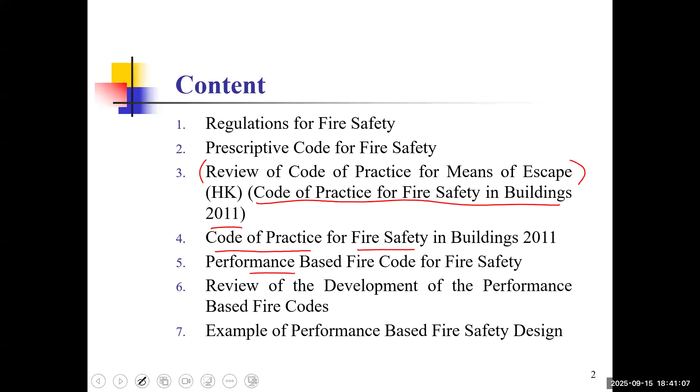Now, why do we need regulations or codes? Have you ever thought of why we need it? Or the other way around, if there are no codes of practice or regulations, what will happen?

The design may be over-provided, or in case of budget cuts there will be fewer sprinkler heads or other provisions than required. It's normally required. I usually use an example of playing board games—we need to follow some rules and regulations, otherwise there will be no correct route to follow, and everyone will play the game in whatever way they like. So we need regulations and codes for fire safety provisions in buildings, premises, or infrastructures.

For building and development control, we need sufficient and adequate safeguards. We need to make sure the building will not collapse under structural loading, and will not allow fire or smoke to spread easily. In some cases we have confinement or compartmentation, which tries to confine and limit the smoke from its fire origin, with safeguards provided for structural walls, partitions, and floors, and separations between different stories in a building.

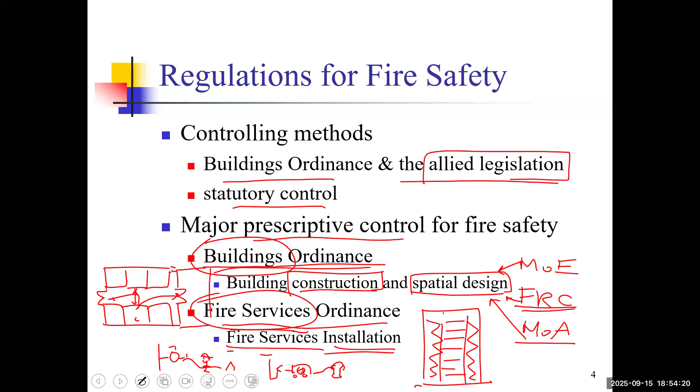Now let's look at the prescriptive code for fire safety. The prescriptive code sets forth the minimum requirement for protection generic by the occupancy. This means the minimum requirement in the FSI codes of practice for active fire service installation, we have particular systems for certain premises.

For example, low-rise hotel - the number of requirements, for example 16. We have the audio visual advisory system, we may have sprinkler system, we may have hydrant hose reel system, etc. So we need to provide these as the minimum standard.

We must provide it according to the codes. It is generic by the occupancy - depending on the usage of the building, whether it is a hotel, an industrial go-down building which is a kind of factory, commercial building for office or business, or domestic building for residential purposes. Different occupancy or usage will have different minimum requirements of fire protection.

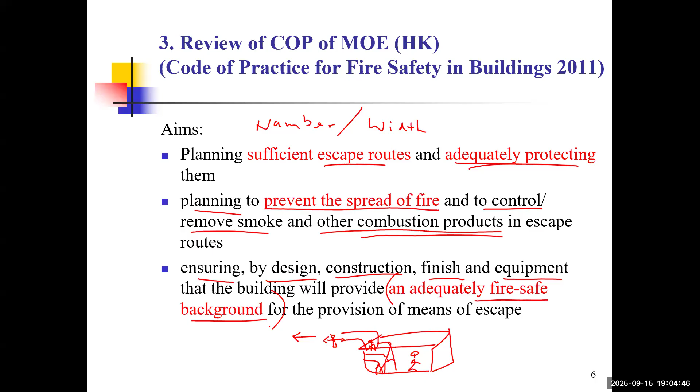If you look at the Code's requirement, which is available at the COP, HKBD for example - the Code's design, and also the manual, Code of Practice and design manual.

We can see the code of practice from MOE, means of escape, which is an out of date version, from 1996. We also have another one, which is the fire resisting construction, and one more, which is the means of access, from 2004. All these have been combined together to become the code of practice for fire safety in buildings.

Now let me take the MOE first, means of escape. The legal requirement mentioned that the requirement for MOE, means of escape, for the buildings are laid in the section of 41 Part 1 of the Building Planning Regulations.

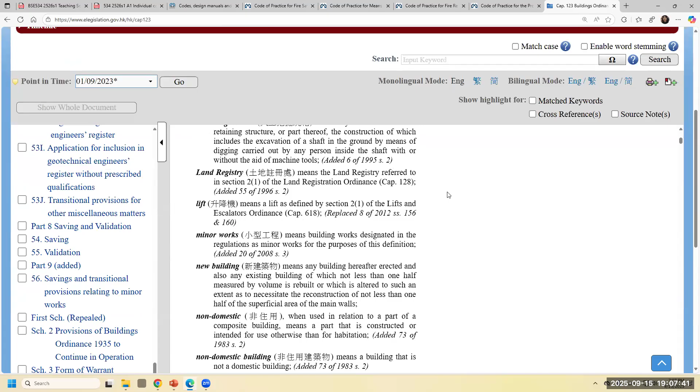We also have, let me see, subsidiary legislation 123A up to 123Q. So these are also the references we have for the Building Ordinance, the subsidiary legislation.

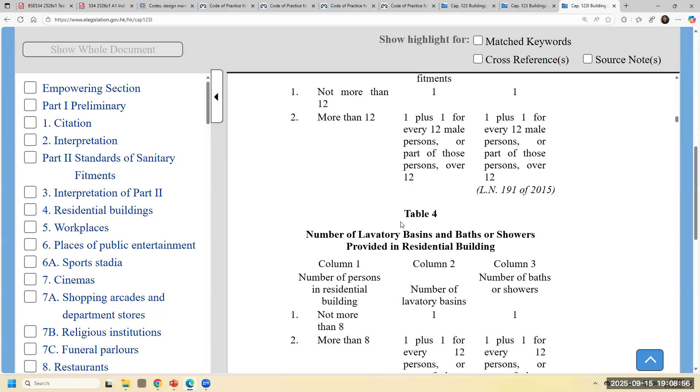Now the one that I've mentioned earlier, standards of sanitary fitments. The sanitary fitments, number of water closet fitments, the number of WC, number of persons for residential buildings, or we have the number of persons in commercial buildings, etc. The number of fitments may be determined.

The number of water closet fitments and urinals provided for male persons in workplace, 11 to 100 people: number of fitments, 1 every 25 male persons, or part thereof, being provided, which I've mentioned earlier. Just want to let you know the details as stated in the requirements. Lavatory basins, not more than 100, then 1 every 25 female persons being provided.

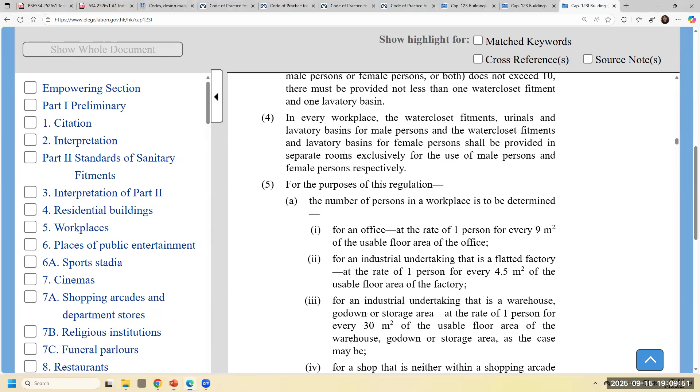Now we have the building planning regulation. For building planning regulation, 123F, building planning and interpretation - what is the meaning, and others have description. We also have guidelines on Section 41 Part 1.

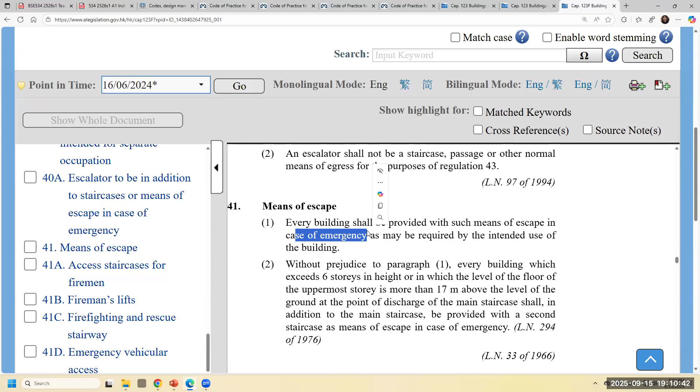So if you look at 41 Part, means of escape, it mentioned that the building shall be provided with sufficient means of escape in case of emergency, which is required with the intended uses of the building. And there may be access staircases for firemen, which allow safe and unobstructed means of access - that is the route for all the occupants in the building in case of fire.

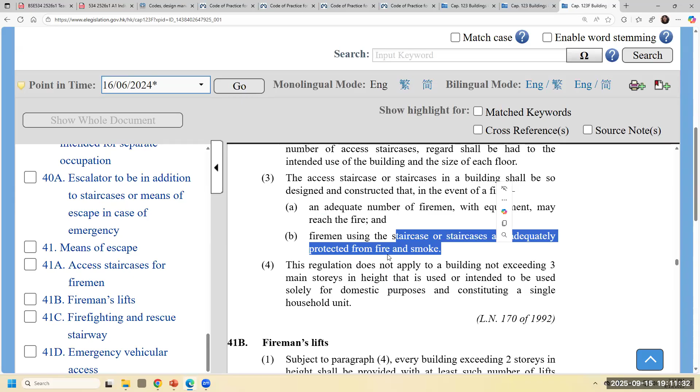So the firemen can have no obstruction in accessing the building. And also access staircases number should be adequate and had to be the intended use of the building and size of each floor - adequate number of firemen with equipment to reach the fire, and also have the staircases to be adequately protected from fire and smoke. Now 41B, fireman's lift, is also provided.

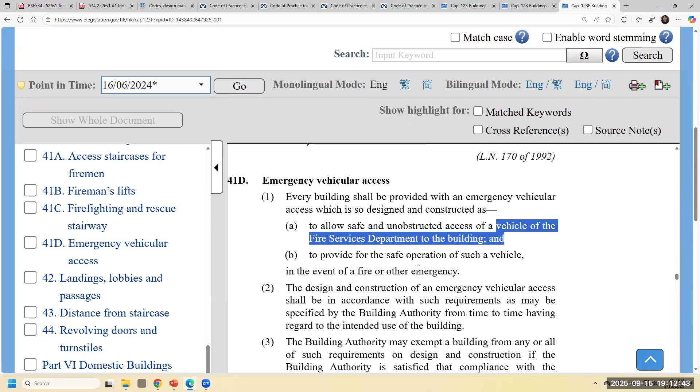Last but not least, we have the emergency vehicular access, EVA. It allows safe and unobstructed access for the vehicle - in a sense we have the fire engine or fire brigade being provided in case of emergency or fire, and operate with the vehicles. So this is the provisions, guidelines and code of practice being mentioned.

Now, basically, all the buildings except those exempted from Buildings Ordinance Control and paragraph 5.1 of the code have additional requirements. What is the additional requirement? Those requirements arose as we may have had fatal accidents occur earlier.

For example, the Bed Space Apartment Ordinance, Chapter 447. We have Child Care Centres Ordinance, Chapter 243. Education premises, Education Ordinance Chapter 279. Factories, Industrial Undertakings Ordinance Chapter 59. Number 5 is Hotel and Guest House Accommodation Ordinance 349. Number 6, Residential Care Homes for the Elderly.

So you can see that these six have different characteristics. The bed space apartment is crowded - the space allows occupants to just have a bed space, closely packed one with another, or having different layers of beds in the apartment.

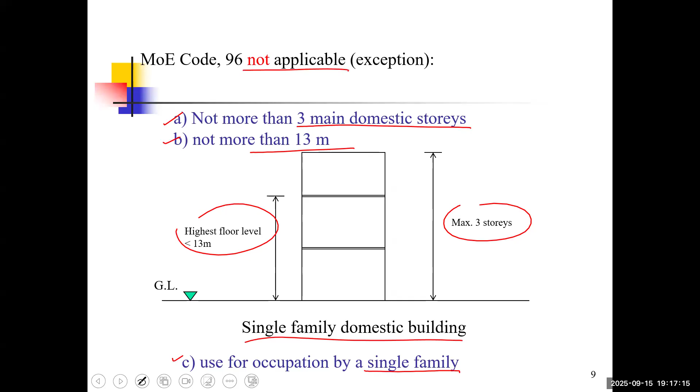Now, the first factor to consider is the occupant behavior and distribution pattern. Behavior in the sense of what activities are being held in the building. Distribution pattern is the number of occupants inside the premises, whether they are crowded together or scarcely apart.

For example, behavior - as mentioned, they can be transient, they may have sleeping risk, they may have varying awareness or consciousness. Mobility may also affect the behavior - transient, sleeping risk, consciousness, mobility, etc.

Now the distribution pattern, whether crowded or scarce - the kitchen may be an area not too crowded, but the area serving food with guests present may have tables closely packed, or the waiters and waitresses may have different patterns, or the area with toilets or corridors may have fewer persons assumed. This is the assessment of accommodation.

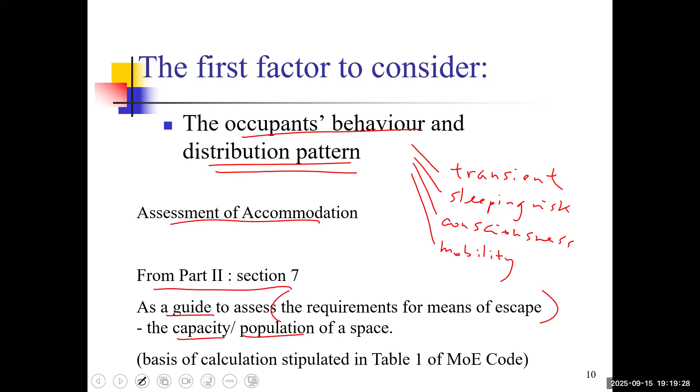We have different parts as a guide to assess the requirements of means of escape. For example, capacity and population of the space - we have a table for the number of occupants present inside the premises.

Now, factors representing usable floor area in meters square per person - that means each person occupies how many meters square. Usually, for example, an office building has 9 meters square per person. If an office area is 80 meters square, with 9 meters square per person, then we have a capacity of around 9 persons.

If it is 900 meters square, there will be 100 people.

Now, restaurant - calculated by the dining area, where people dine and have meals together, at 1 meter square per person. Whereas the kitchen allows 4.5 meters square per person.

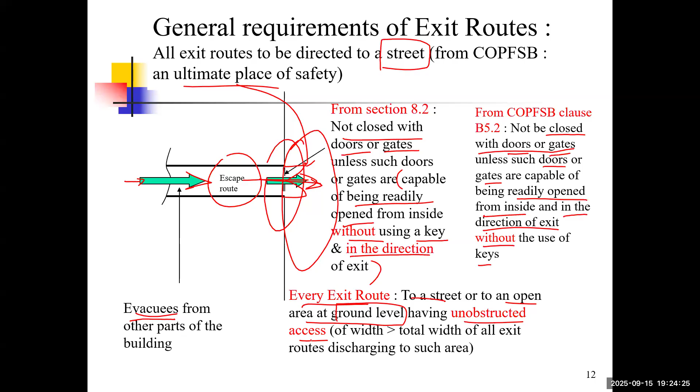Every exit route to the street or open area at ground level has unobstructed access. That means the width should be greater than the total width of all exit routes discharging to such area. We need to make sure that as we assume 1,000 occupants to evacuate at a certain width of exit, it should not overload it, and should not have, say, 1,500 occupants unable to evacuate in sufficient time.

Exit routes lead to the rear lane, the back lane of the street. This is from sections 8.5 to 8.6: a 450mm return, and the width of the exit should not be obstructed or reduced, as shown in green. So the evacuation route is escaping in the direction of the back lane or the private lane.

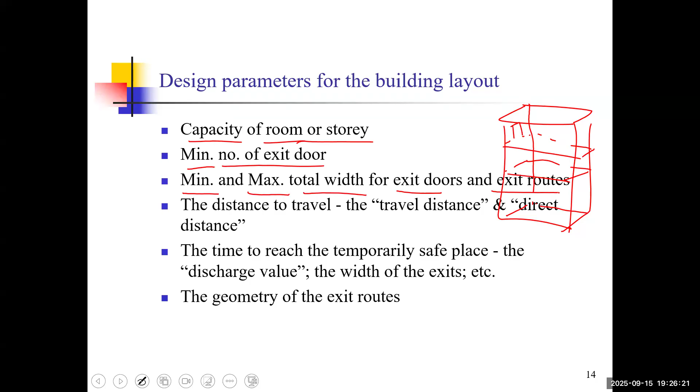Now, for the design parameters of the building layout, we look at the capacity of the room and the story. We note the floor area of each story, the minimum number of exits, the minimum and maximum width of the exit door and exit route. There may be stairs available, and here there may be another stair.

Distance to travel, that is the travel distance or direct distance, is the time to reach the temporary safe place. We have the discharge value, which we will look into more detail later, and the width of the exit, and the geometry of the exit route, whether it is a zigzag way or a direct evacuation route. So these are some of the parameters.

Where the exit door exits from the story, the flats, or each story, and the premises or room - like us, in the lecture theater, we have 2 exit doors which give access from this room to an exit route outside, to core F and core J. And we have the evacuation route, or exit route, which is a route where people on any story, like this 3rd story of the building, may reach a place of safety outside the building, like the podium level, which is outside the building, including rooms, doorways, corridors, staircases, and areas of refuge on refuge floors. In higher or taller buildings, we may have refuge floors available for the temporary stay of occupants.

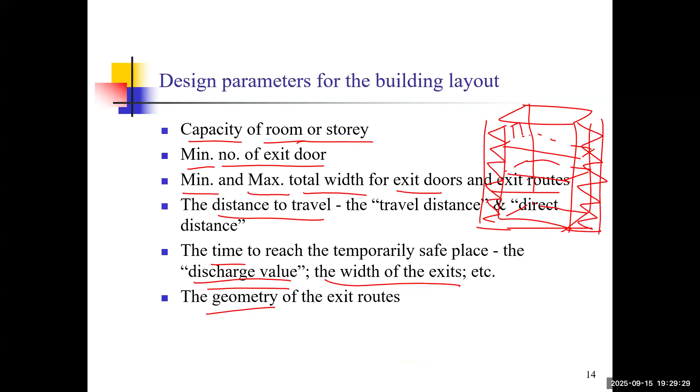As mentioned earlier, we have the number of persons checked, because each person occupies, say, 9 square meters, and we will assume, for example, 900 square meters will give you 100 people, each 9 square meters per person. And then we have this for a certain story, and if we multiply the number of stories, the width of the staircases will also increase.

There is a discharge value table for reference in later slides. When we go through it, we can have more detailed investigation on that.

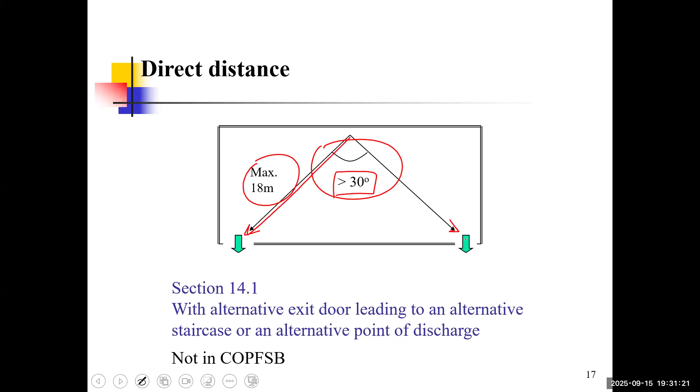So direct distance, according to the Code of Practice of Means of Escape, has a maximum distance of 18 meters for angles more than 30 degrees, which allows an alternative exit at more than one location. So in case one exit is blocked due to fire nearby, we use another to evacuate - alternative staircase, alternative point of discharge.

Dead end distance is the overall length of the travel distance within one exit route before an alternative exit is available. For a single room, we have a maximum of 15 meters if that alternative door is not provided, and the direct distance should not exceed 15 meters - that is the maximum.

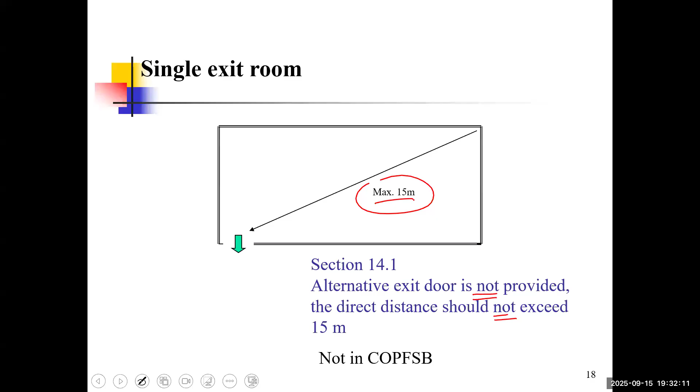Now if we look at the diagram with internal corridor access, the direct distance maximum is 15, as mentioned, D1, smaller than angle 30, and D2 is greater than angle 30, maximum 18. We have D1 here with only 1 exit door, whereas here we have 2 exit doors for a larger room, and another 2 exit doors available.

The travel distance is considered from the exit door to the staircase. We have travel distance D6, or staircase separation, D3 to D3 plus D5, which is from the midpoint of the travel to the staircase to the other staircase.

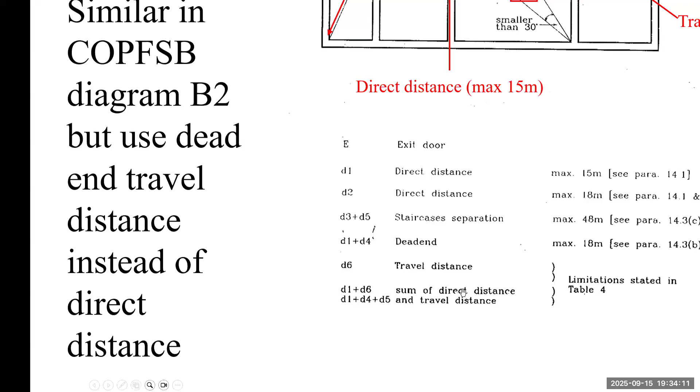The dead end is D1 plus D4, which is maximum 18. So in fact, similar to the Code of Practice for Fire Safety in Buildings diagram B2, we use dead end travel instead of direct distance. This is listed and extracted from the Means of Escape code of practice.

Now, limitation on direct distance and travel distance for buildings with 2 or more staircases. We have the maximum sum of direct distance and travel distance noted for different types of buildings - office, shops, schools, or other cases. So other than office, schools, and shops, it belongs to other cases. And there are different types of exit routes.

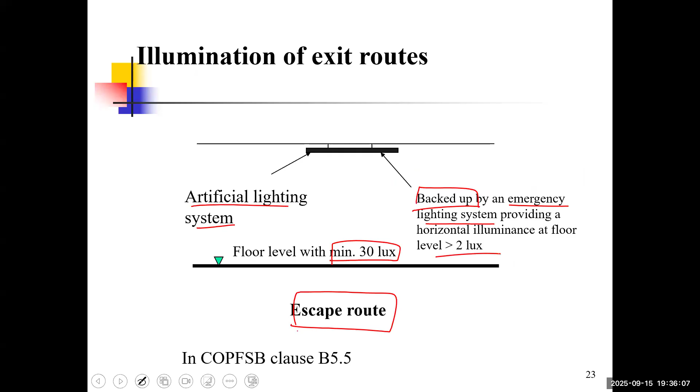Internal access requirement: A and B together given in table 4 should be within 30 to 45 meters. We have the escape route with floor level minimum 30 lux with the artificial lighting system - lights, luminaires, lamps, etc. Whereas the backup emergency lighting provides 2 lux, horizontal illuminance on the floor level.

Now, exit from the room. Capacity of room or the story will give you different numbers of exit doors. How do we determine the number of exit doors for a room? For example, 4 to 30 people, we have 1 exit door. If more than 30, that is 31 to 200, there are 2.

Depending on the total width given, even though we have 2 exits for 3 categories of occupants, they may have different widths of exit door and total width of exit door and exit route given. 1.05 meters is the minimum for 2-story, two exit doors or exit routes, whereas 1.2 is for other occupants. So the number of exits and minimum width of exit doors and exit routes are in table 2 of the MOE code.

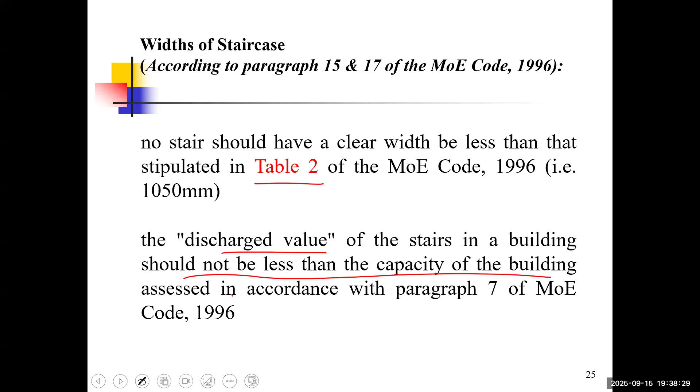Now for width of staircase, no stair should have a clear width less than stipulated in table 2. Discharge value should not be less than the capacity of the building in accordance with the Means of Escape codes.

Now here it's mentioned about the discharge value calculation. P is the discharge value, N is the number of staircases, and C is the capacity of the building over ground floor, given in table 5 and 6. Table 5 and 6 are determined by whether it is a sprinkled or non-sprinkled building.

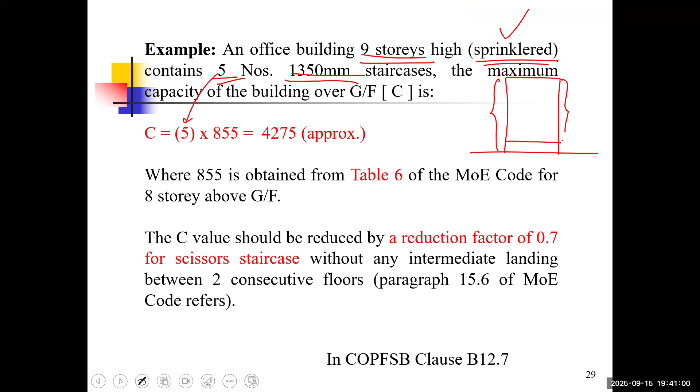Table 6, 9-story building. That means it has 8 stories, excluding the ground floor. There are 8 stories covered, total 9-story including the ground floor. So 8 stories in total. So we look at the 8th floor.

The exit width, the width of the staircase, is 1,350. So we read through this and read through 8-story: it's 855 each. Now we have 5 staircases, so approximately 4,275 people.

8-story above ground floor, so the C value should be reduced by a reduction factor of 0.7 for a scissor staircase. By experiment and research study, we noted that for a scissor staircase, like the scissors we are using, it has a construction something like on the right-hand side, the scissor staircase.

It is found that a reduction factor of 0.7 is noted without any intermediate landing between two consecutive floors. If it is just a regular staircase, we have one exit from each floor going to another floor. But for a scissor staircase on the same floor, there are 2 exit doors available on each floor.

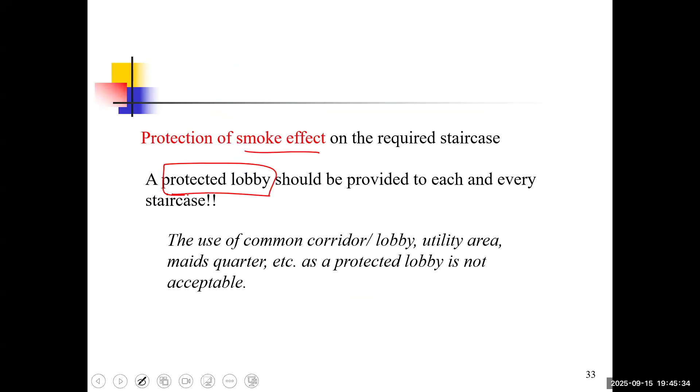Protection from smoke effect on the required staircase: a protected lobby. Sometimes there may be a double leaf of doors available before entering the staircase. The use of common corridor, common lobby, utility area, or maid's quarters as a protected lobby is not acceptable.

And the discharge value of the staircase should be greater than the total capacity of the building. So the allowed number of occupants that can evacuate from the building via the staircase should be larger than the total capacity of the building, that is, the number of occupants inside the building. Table 5 is for non-sprinkler buildings, Table 6 for sprinkler buildings.

If the exit direction is upward, as for the basement, we have a factor multiplying 0.8. If it is a scissor staircase, multiply by 0.7. This is considered a study.

Building Planning Regulation 39: for a building exceeding 4 stories, a second staircase or continuation to the roof should be provided, and the separation between staircases should be less than 48 meters. Maximum 6 stories, below or equal to 6 stories, we can have a single staircase. Uppermost story less than 17 meters above ground level, roof for refuge — this is the number of occupants permitted.

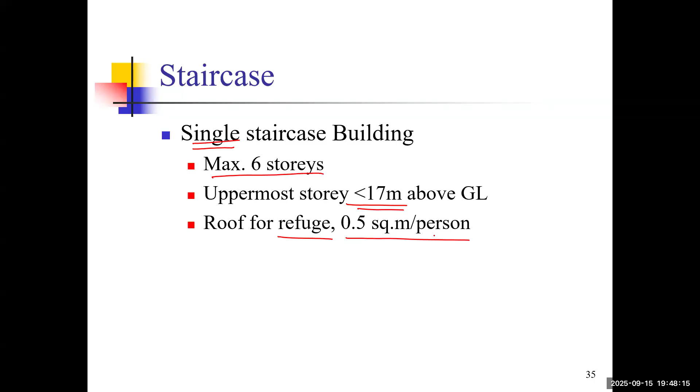Any other questions?

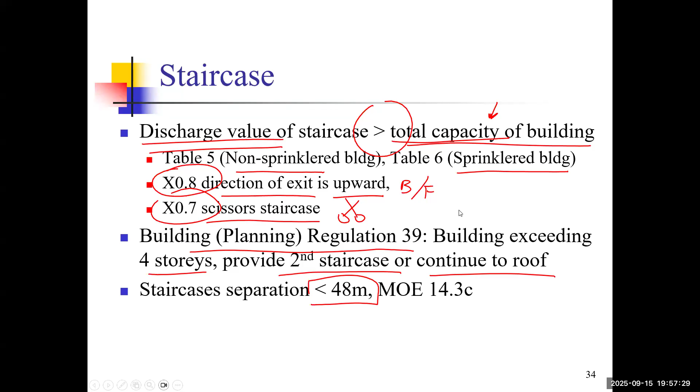Now for the exit door, across the exit or into the exit route from a story or room of capacity exceeding 30, it should open in the direction of exit, that is outward. If constructed to open both ways, it must have a transparent upper view panel so we can look through, either circular or rectangular, with glazed glass.

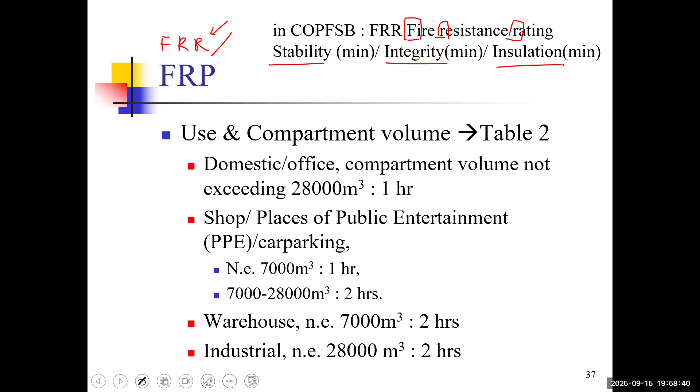Fire resistance period or fire resistance rating - the latest description is fire resistance rating, FRR, which consists of three criteria: stability, integrity, and insulation. These depend on the usage and compartment volume, as shown in Table 2.

For example, the use could be domestic, hotel, office, shops, place of public entertainment, hospital, place of assembly, car park, bulk storage, warehouse, or industrial undertaking excluding bulk storage or warehouse. It depends on the compartment volume. For example, for the atrium, we have the fire resistant period, FRR or FRP, but the latest term is FRR.

If it's not exceeding 28,000 meters cube, we just need 1 hour for domestic, hotel, and office. If it is public entertainment, shops, and hospital, etc., not exceeding 7,000, it's 1 hour. Exceeding 7,000 and not exceeding 28,000 meters cube is 2 hours.

And for warehouse and industrial, we have a separate compartment volume, separated into 2 hours for both.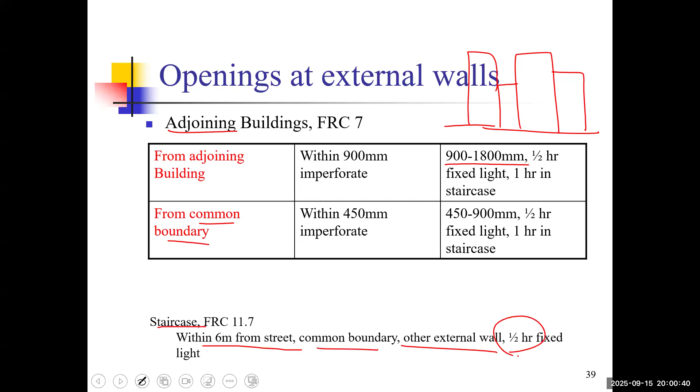We also have the vertical barrier, so in case smoke is generated, the smoke will be trapped within the certain floor before it spreads to the upper levels. This helps to buy time to prevent the spread of smoke.

Basement should have not less than 2 exits, except when it is quite low, below 3 meters in height, very small, less than 150 meters square, solely or only for lavatory or plant room purpose. No staircase serving upper floors should continue directly into the basement.

As I've mentioned earlier, we should not have the exit or staircase in continuation - we need a separate one. We need to go down and then go up to another place; it should not be continuous. Otherwise, people running down may not find the exit to the ground floor and go directly to the basement instead. There should be directional signs, exit signs. At least one exit should discharge independently from another exit into the street.

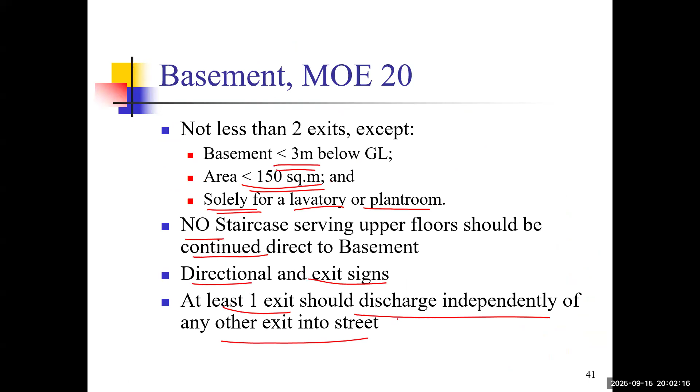Smoke outlets are sometimes provided, for example, if we have a basement, at the perimeter of the building. So this is the ground floor, this is the basement - in case smoke is generated, we break the outlet and allow the smoke to come out of the smoke outlet from the basement.

MOA, means of access, includes the access staircase, fireman's lift, and firefighting and rescue staircase, which we call FRS - F for firefighting, R for rescue, S for stairway. A fireman's lift is not required for this criteria.

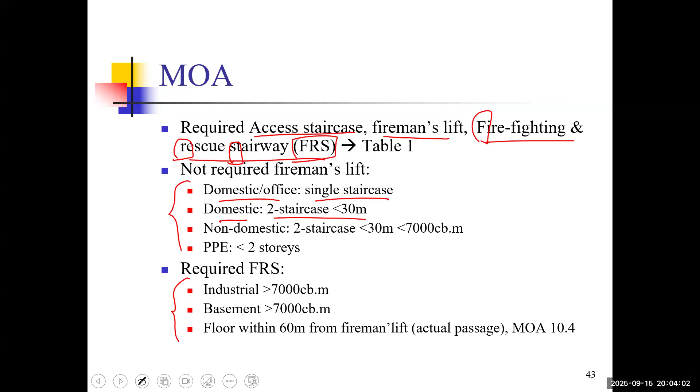In the future, if you find a similar situation - domestic office, single staircase, 2 staircases less than 30 meters, non-domestic, and place of public entertainment - this is not personal protective equipment but public entertainment, industrial basement - there is a certain cubic meter compartment volume requirement.

Fire service access point to ground floor. Push open in the direction of exit to outside. Firefighting lift, fireman's lift with an exit distance from the protected lobby, 18 meters.

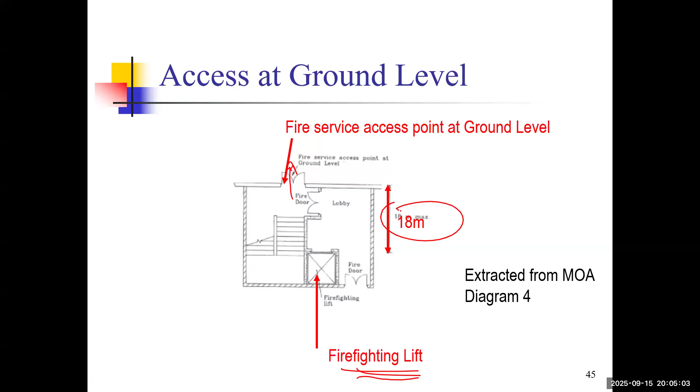Refuge floor is another part, a floor designated especially for refuge purpose. The roof can be made as refuge, with minimum 2-hour fire resistant rating, and provision of sky garden in the refuge floor.

The refuge floor should be provided for all buildings except domestic and composite buildings. For example, greater than 25-story at each 20-story interval, or each 25-story interval for industrial and non-industrial purpose. If it is domestic or composite building, you can go back to the FSI code for the definition.

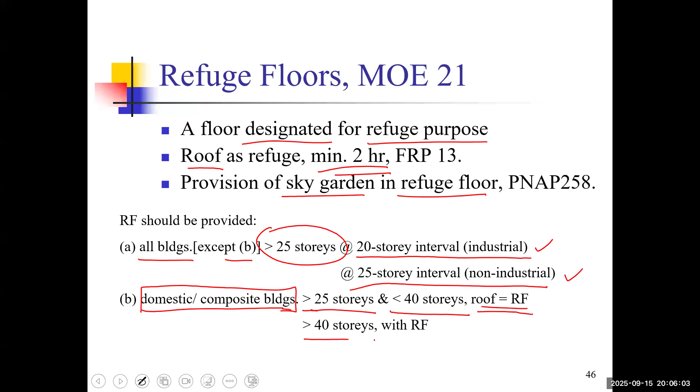Between 25-story and 40-story, the roof can be considered as refuge. And if it is greater than 40-story, a refuge floor is required.

Why is a refuge floor being provided? It can be considered as part of the exit, for temporary and short rest of the occupant, especially in super tall buildings. They need to have a refuge floor in between, so occupants evacuating should be able to take a small rest on the refuge floor, RF.

And an alternative staircase, so they need to go to the refuge floor and then go down again to an alternative staircase. In case of smoke logging, if this is blocked with smoke, it will not spread to the alternative staircase in one go. Now, place of assembly and temporary safe place for the occupant.

There are some requirements during design: no accessible accommodation, no people to stay in the refuge floor, no plant room except a net area greater than 50% of gross floor area of the refuge floor.

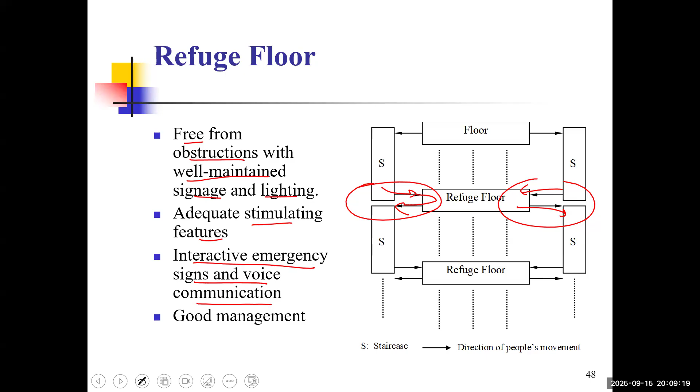No obstruction at all. Adequate stimulating features and interactive emergency signs and voice communication, so occupants are notified of the location they're staying, with good management.

Now the next part is the code of practice for fire safety in buildings. Special concern: the MOE, MOA, and FRC are in parts B, C, and D. MOE, FRC, and MOA - we have part E, which is the fire property of the building elements and components.

Some of them are load bearing and some of them are not - we may have concrete, stone, masonry, glass, etc. Fire safety management is part F, and part G is engineering guidelines.

Now for the annex, there are lists of codes of practice and guides which cover and are issued by the licensing authority for licensed premises. Now for part G, we focus on the engineering guideline.

Fire engineering guideline has several sections, including the introduction, the framework, and introduction to fire engineering. There are clauses which comply with the framework for fire engineering, and they emphasize the fire safety objectives and functional statement - this may be discussed later.

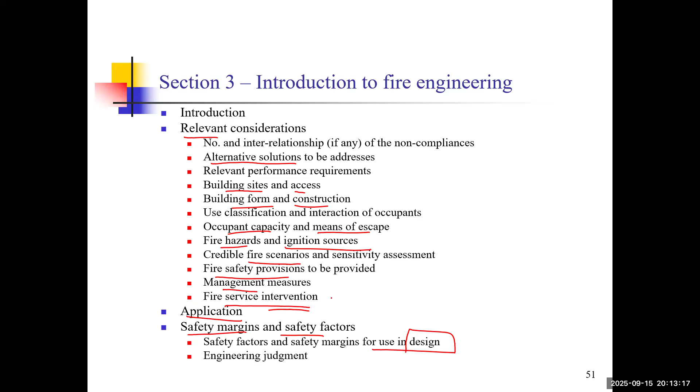Now, regarding the methodology of fire engineering, we look into compliance with the performance requirement. There are different types of assessment methodology, which include the deterministic and probabilistic methods.

And the subsystem, we have 6 of them. Subsystem, SS, which is from the start of or ignition, initial development of the fire. And after fire start, we have the development of smoke, and it may spread, and we need to control or extract it. Detection, warning, and suppression. So in fact, this indicates different stages of the fire, from the ignition stage, the development stage, the growth stage, and the decay stage. For fire spread and the impacts and how to control.

And the characteristic of the occupant will also affect the methods and the use of systems, evacuation, and fire service intervention with regard to the firemen and fire officers.

Designed by fire engineering. There are different stages of fire using different or applying fire engineering approach. And there are different processes: pre-submission, requirement, assessment approach.

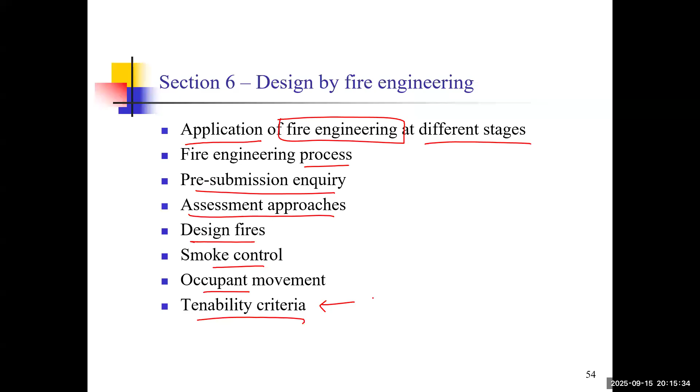Now, the fire safety assessment report. We have the introduction, and as the first items, building usage, and the classification, the characteristics of different buildings and the occupant, whether they comply with the codes, and what is the judgment or justification.

For example, we have different trial design solutions to solve the engineering problem. Assessment of structural performance, not only the active system, but the building's performance, commissioning and field testing using hot smoke tests, especially for atriums.

Atriums - we need to ensure the mechanical fans, for example, or the natural operation of the natural ventilators is functioning properly during the field test. Maintenance and management.

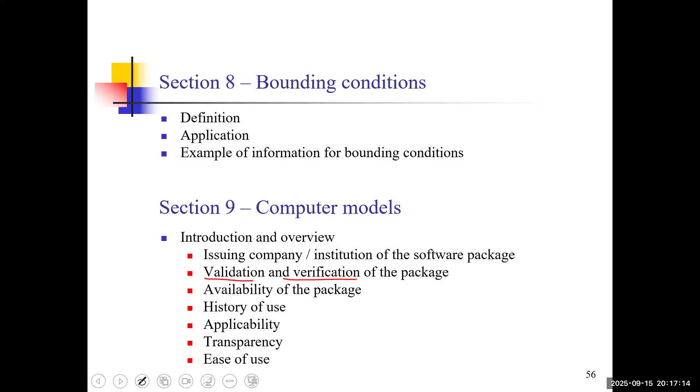Bounding conditions, information, examples, computer models, which we have validation and verification to ensure that they are correctly used and they perform accurate calculations as designed. History, etc.

Now, next part will be the performance-based fire code for safety. Consider the entire building fire and building system interaction, which may exceed the prescriptive requirement.

Especially as technology advances and also the architectural features may no longer be just rectangular shape, but they have more aesthetic design. For example, the airport or the convention center or the sports stadium, etc. Greater flexibility in design is needed.

And they should also be cost effective. They consider the use of materials, the design provisions, whether the space separation of the sprinkler heads or the detectors, etc., should be noted. Now, a need for clear specification and agreement with the fire safety goals and objectives.

And they also mention the performance criteria in design. So we need to understand how the fire developed, starting from its initiation, how it spread.

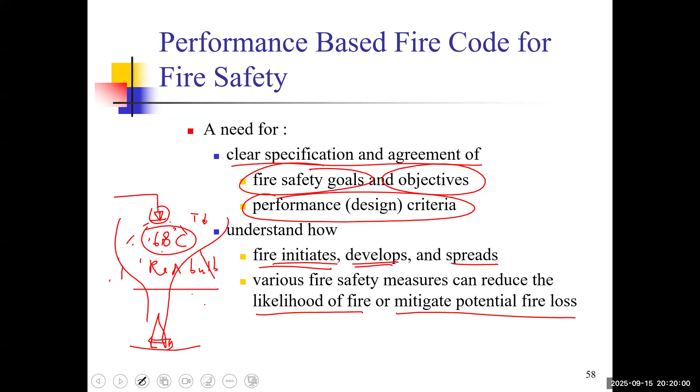It also helps to cool down the smoke, which reduces the temperature, and the structural resistance of the compartment or the room can sustain a longer duration, and it also helps to prevent the spread to adjacent objects.

It prevents and takes a longer time for the fire to spread to adjacent areas, and it also displaces away oxygen. When the water droplets change state from liquid water to steam, it absorbs heat and also changes state to steam, which will displace away oxygen. So this helps to minimize and mitigate the fire loss.

Need to understand how people react. Both human psychology and physiology need to be understood. For example, the fight and flight response: they may try to evacuate in a calm or frightened manner. They also have other situations, like trying to search for family members or friends before they evacuate. So this needs to be understood.

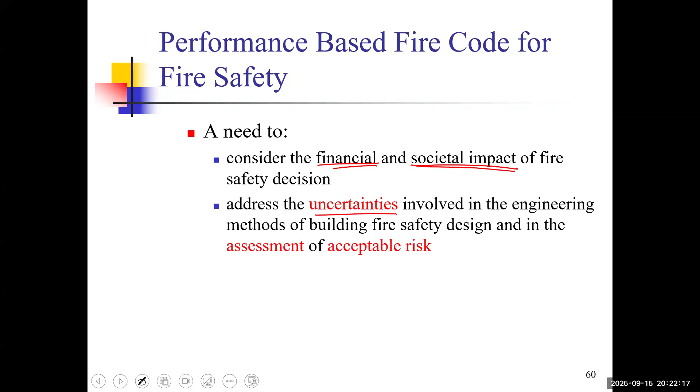They also apply credible tools and methodologies and consider acceptable risk, both personal and societal, in designing appropriate measures. So we have the personal effect and societal effect. Groups of people may try to gather before they escape, and we verify this acceptance level to be met. We need to consider the financial and societal impacts, the cost, address uncertainty involved in the engineering method, and building safety design in assessment of acceptable risk. Make sure that it is acceptable.

Now, for the review of development of the performance-based fire codes, we may have different International Standards Organization, the Technical Committee on smoke control, to evaluate ability on the fire safety design and meet objectives of the codes.

So different sections: fire initiation and growth, containment. As mentioned, starting from the initiation stage, growth stage, development stage, and decay stage. The growth stage with the steepest slope indicates flashover. Then fire development and decay.

We need to consider the containment of fire with passive design and active systems. Passively, we may try to confine or contain it by partition or wall, like a small room. Actively, we may try to suppress the fire using the fire protection system or fire service installations. Fire threat to people and the environment, and fire safety engineering. So the organization structure consists of these four aspects.

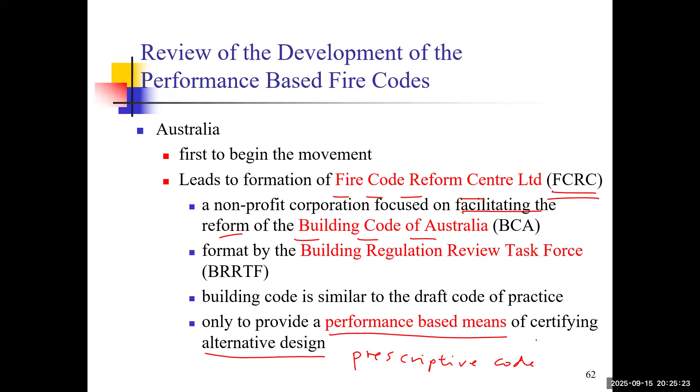Now, the building code is similar to a draft of the Code of Practice, which provides only the performance-based means of certifying alternative design. Alternative in the sense that besides the prescriptive code, we have an alternative to prescriptive. We have an alternative way to provide similar safety of the premises.

Next is Canada. David Yung, a researcher, and colleagues have the NRCC, National Fire Research Laboratory of the National Research Council of Canada. NRCC developed FiRECAM, the fire risk evaluation and cost assessment method and model, as key elements for the performance-based fire code.

England and Wales, Europe: from 1985, the building regulation has been revised and utilizes performance language to allow alternate design. It shows that it provides equivalent performance using methods with supporting calculations and reasonable methods. Now, the code of practice was further developed by Warrington Fire Research and other researchers and fire experts.

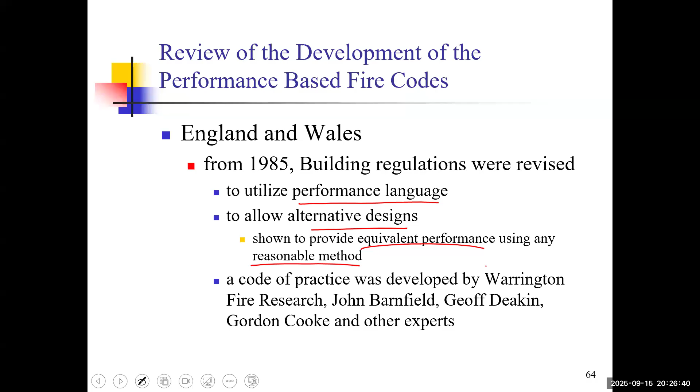New codes of practice were issued to establish acceptable levels of risk of life lost. For example, there is consideration of 1.5 times 10 to the power -5 per person per year for a house. Places other than the house have a less acceptable limit, also limiting the risks of greater than 10 deaths per incident to a certain value per building per year. Different numbers for different buildings and years.

Now to the south, New Zealand: the building codes in 1992 were introduced in a performance-based format. The codes keep the prescriptive requirements acceptable, but supporting calculations are needed for any occupancy, especially where the fire load is greater than 1,500 megajoules per meter square.

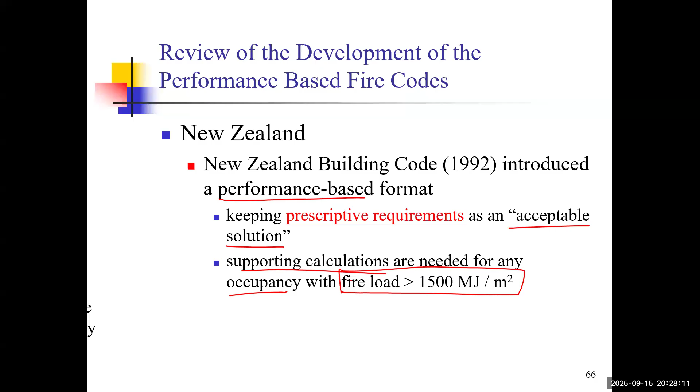There's also a fire engineering design guide published by the Center of Advanced Engineering at University of Canterbury. It's decided that the protection of property at regulated occupancy is the responsibility of the owner and the insurance company—they need to take responsibility on that. The codes only include provision to protect property of third parties.

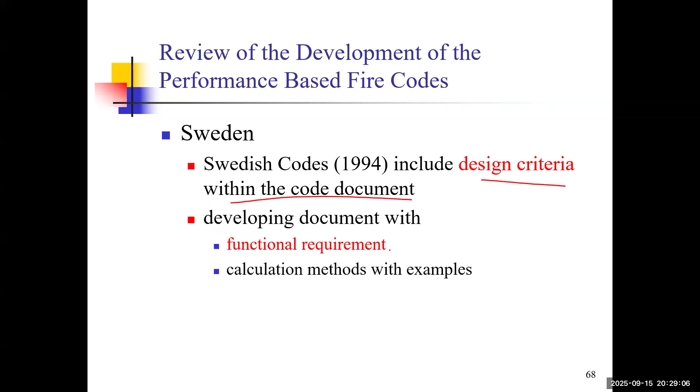Swedish Code 1994: design criteria within the code document and developing document with functional requirements, calculation methods, with examples.

US: 50 states derive activities from a number of private codes and standards organizations. NFPA, the National Fire Protection Association, published the Life Safety Code NFPA 101, based on different occupancies and characteristics of the occupants inside buildings. SFPE, the Society of Fire Protection Engineers, is also being considered.

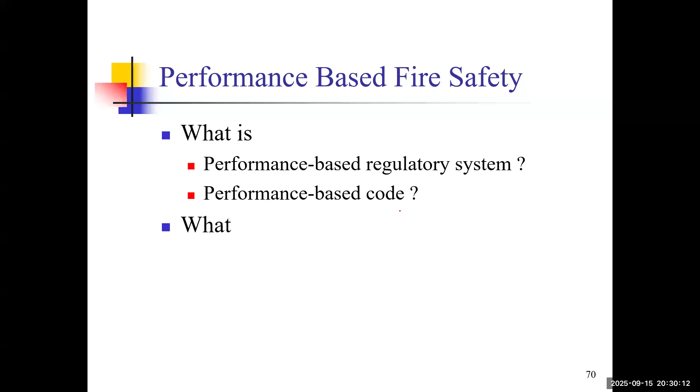Now, what is a performance-based regulatory system? And what is a performance-based code? What happens to prescriptive requirements? And how is compliance with the performance-based codes being determined? These may be some of the queries that we may have in mind.

The codes themselves have the societal goal and some objectives and performance requirements. There are acceptable solutions and options to comply with the codes. We need to evaluate whether the design matches or provides sufficient safety for the occupants.

There are different tools, for example, simulations, evacuation tools, to simulate the situation with different numbers of occupants and see whether the required safe egress time is within the available safe egress time.

Now the concept: the requirement of the code refers to what should be done. Acceptable means for complying with the requirement - how should it be done, what is the requirement, how can it be achieved. Acceptable means of verifying whether the proposed solution complies with the code's requirement - how it can be verified, how to ensure that it is acceptable.

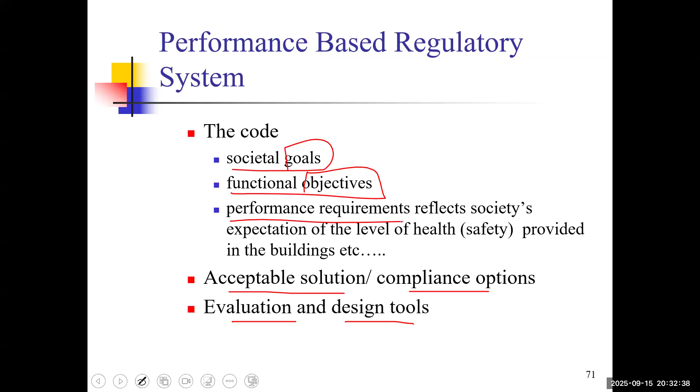For codes and standards, we have the regulatory motives for analysis and design of the fire safety measures. The building codes require an acceptable level for the fire - how large is the fire size, for example - and life safety is the fire safety objective, to protect human lives. It is not a means for compliance, and it also needs to identify some acceptable methods, some ways.

For the codes, as mentioned, we have the societal goal, objectives, performance requirement, performance criteria. This in fact reflects the maker's interpretation of the society's expectation for health, facilities, or the safety level in the buildings.

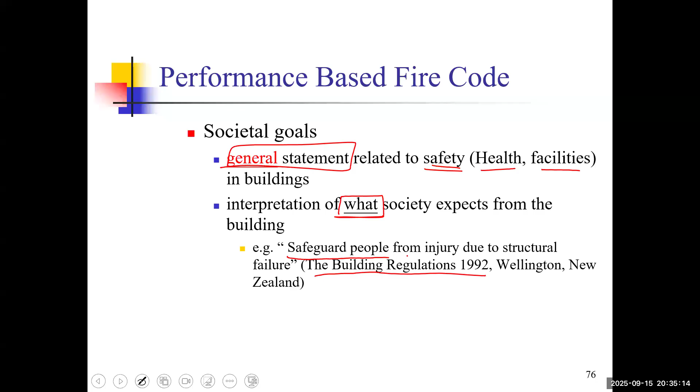For the societal goal, it is defined by the general statement which relates to safety in the building. This general statement may be considered with respect to the health and facilities inside the building and what society expects of the building - for example, safeguard people from injury due to structural failure. This is listed in the building regulations.

It is just a general statement indicating people should be protected from any injury, not injured by structural failure or collapse. Functional objective is described in more detail, how the building and the system will function to achieve the goal - how to achieve this.

For example, again the building regulations of Wellington, New Zealand: the building is to be provided with safeguards to prevent fire spread, so occupants have sufficient time to evacuate to a safe place without being overcome by the effects of fire - no suffocation, no blocking of exits due to smoke, fire, or heat. This is a longer description considering the function.

For the performance requirement, it is an even more detailed statement of the level of performance that should be met by various parts, materials of the building, assemblies, systems, components, and design factors. This helps to evaluate how the building and design features will meet the goal and functional objectives - this is also why we have the triangle, one layer after another, with the goal described in more detail through alternative solutions, function, and performance requirements.

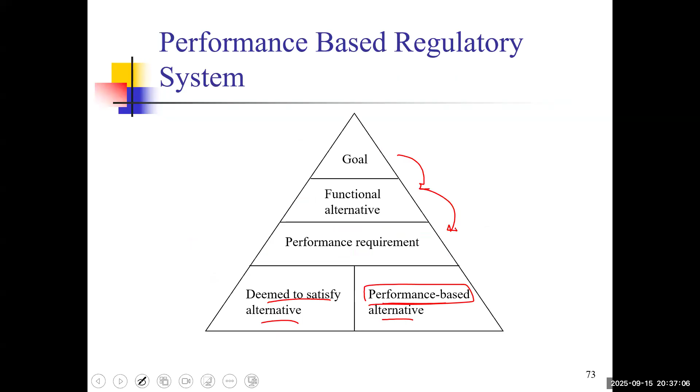Now for the performance criteria, it is acceptance criteria that may be provided in the code. Some are standards and some are other methods, taken as a reference, and some even use absolute values.

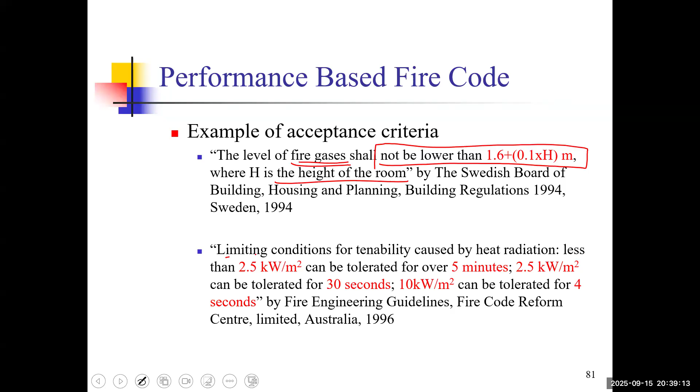Another example: limiting the conditions of tenability caused by radiation, with higher temperature, heat released in radiation, and means of heat transfer. Less than 2.5 kilowatts per meter squared can be tolerated over 5 minutes, or tolerated for 30 seconds, 10 kilowatts per meter squared tolerated for 4 seconds, according to fire engineering guidelines.

Let me check. Okay, this is 2.5 and this is also 2.5. I check whether there is a typo there. Because this is 10 kilowatts for 4 seconds, it should be increasing in the heat radiation. But this is less than 2.5 for 5 minutes, whereas 2.5 is 30 seconds and 10 kilowatts per meter square is 4 seconds.

Now for the performance criteria, several performance criteria are applicable to a single problem. We may try to select the criteria depending on the situation, using different acceptable methods not in the code. Knowledge required to develop performance criteria may not exist, because it's not sensible to regulate criteria when the scientific basis is unclear.

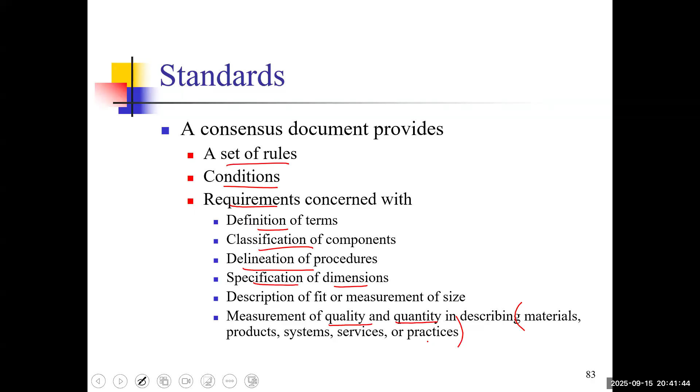For standards, it is a consensus document with a set of rules, conditions, and requirements. It also has definitions, classifications, delineations, specifications of dimensions, etc. So it is a measurement of both quality and quantity to describe different methods, different materials, products, systems, etc. There are different descriptions.

Further on the property of material, whether it has sufficient strength, elasticity, durability, combustibility, etc. What is the amount of heat release? Is it durable? Dimension, pipe thread size, the diameter of the pipe internal and external, diameter of the pipe works. Test procedures for how strength, flame spread, and electromagnetic compatibility are tested. There are methods and procedures for installation, testing, commissioning, maintenance and operation, etc. Terminology is also required.

Now, most current building system related standards are prescriptive based or specification based. So it's stated clearly what types of building usage and what systems should be used and what the specification is. Take hydrant and hose reel as an example: we may try to limit or specify the performance of the hydrant outlet. For example, it needs to be of a certain height above the finished ground level, and it needs to have pressure and flow rate of a specified range.

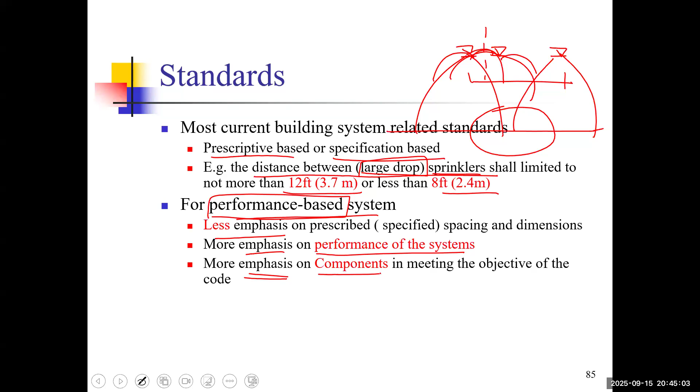Performance-based systems place less emphasis on prescribed spacing or dimension. So if it is performance-based, we do not specify a specific distance, but place more emphasis on the performance of the system, whether it can achieve the objective or functional objective of the sprinkler system to attain life protection or inhibit fire spread, and more emphasis on the components meeting the objectives of the code.

There are different acceptable methods for the engineering standard or engineering practice developed through a consensus process. Qualified engineers, educators, and researchers are involved, and there is a reality check by the broader building and fire community, so a large number of buildings are taken into consideration in surveys and studies. Each automatic sprinkler system requires another section of the code to be installed according to NFPA 13, which is a standard for installation of sprinklers, as an example.

Computer fire modeling as a design tool or for evaluation requires peer review. Different parties or researchers will be involved, challenging certain tools to ensure they are valid and verified. They are developed in, or receive positive evaluation through, a consensus process among qualified engineers, educators, and researchers, who are positively evaluated to make sure they have the ability to generate outcomes consistent with those claimed by the developer.

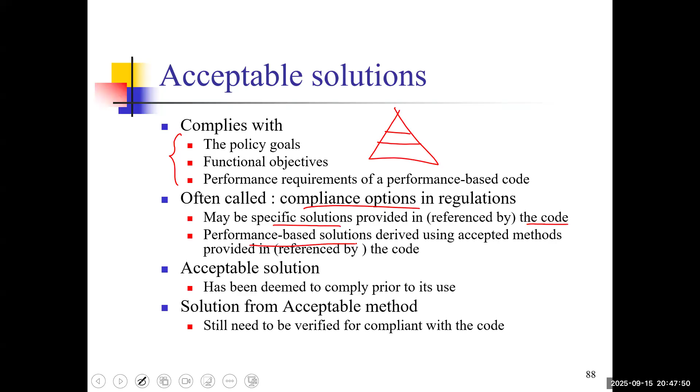Acceptable solutions comply with the three main goals: the objectives and the performance requirements, often called compliance options in regulations. They can be specific solutions in the codes, or performance-based solutions, which have different methods provided in the code. For acceptable solutions, they are deemed to comply before their use, meaning they need to be ensured to comply or achieve the same performance as the prescriptive codes. Solutions from the acceptable method still need to verify compliance with the codes.

Now for modeling. Computer modeling in fire safety engineering design is not simple. We need to understand the physics and chemistry of enclosure fires. For example, what you have studied in fire dynamics, BSE 533, may be useful to assess the validity of the result and also make sure that the simulation result is accurate.

There are different types of models available in the market. Some are probabilistic models, some are deterministic models. Probabilistic models include the network model and the statistical model, whereas more often we will consider zone models or field models. CFD, computational fluid dynamics models, are commonly known.

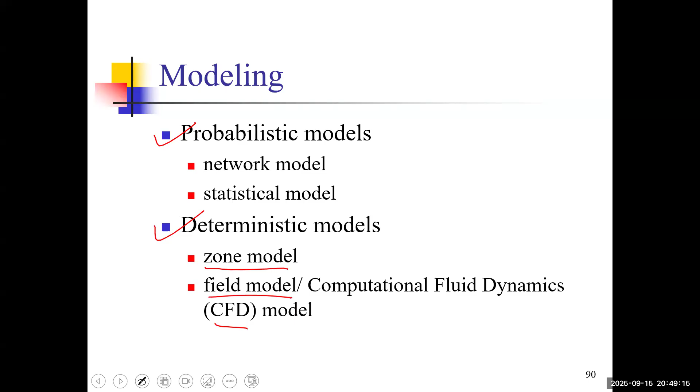Now for the probabilistic model, it relates to building fire safety, which does not make use of the physical and chemical principles involved in fire. Some statistical predictions are made, considering change from one stage of fire growth to another, as mentioned, the different stages of fire. The course of fire is described as a series of discrete, separate stages, based on experimental data and incident statistics, and they are derived as time-dependent probability for the possibility of fire changing between different stages.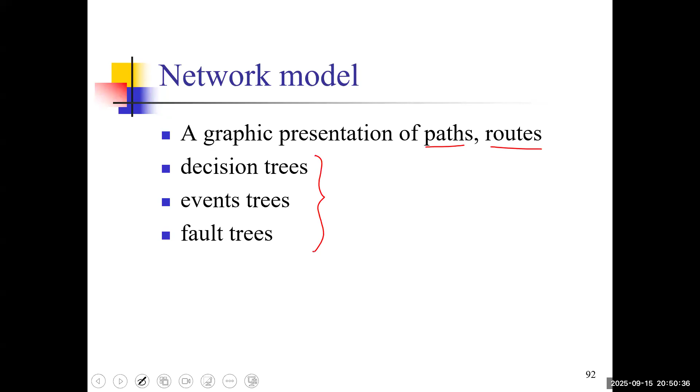Network model usually considers some graphics presenting the paths and routes. There are some event tree, fault tree analysis, and decision trees being made. And for the statistical model, it describes random phenomena with probability distribution based on historic data, engineering evaluation, or both.

One of the common simulation models is the Monte Carlo simulation. It involves fire development and determines ignition, flame spread, fire load, and ventilation. Sometimes in the fire stages it is a fuel- or ventilation-controlled fire, and the computer program will also randomly allow the fire to progress from one defined stage to another, studying the importance of the parameters.

Whereas for the zone model, you try to divide the room or compartment into two zones: one is the upper layer and the other is the lower layer. This is usually called a two-zone or two-layer model.

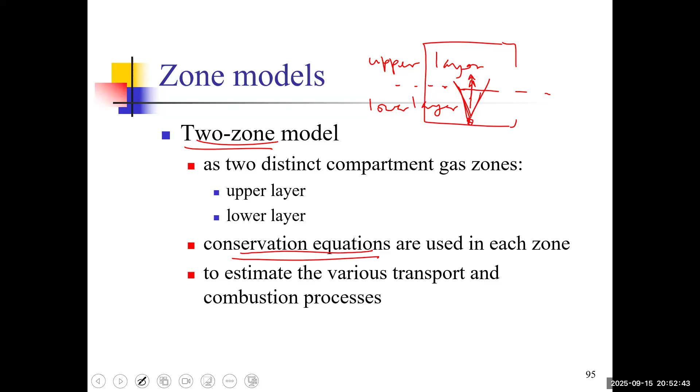Conservation equations consider there is a point source, the mass transfer is conserved, and another conservation equation is considered through the lower zone to the upper zone, with the fire plume being considered as an inverted cone. This is used to estimate various transport and combustion processes in between.

So this is the hot smoke layer usually — the upper layer having hot smoke. With its high temperature, density will decrease and it will rise to the top, whereas there is air entrainment in the lower layer, where cooler air is available, and usually openings should be provided at lower parts.

For the room fire, normally we have the fire occur, for example, at a polyurethane sofa, with air entrained and a smoke plume considered. When it hits the ceiling, there is a ceiling jet spreading radially throughout the whole compartment, so the smoke layer gradually forms.

With the hot smoke layer, it is considered as two zones, a hot zone and a lower zone — one is hot and one is cold. With the mass transfer in between the fuel and the hot smoke layer, we have the control volume as stated in the two-zone model.

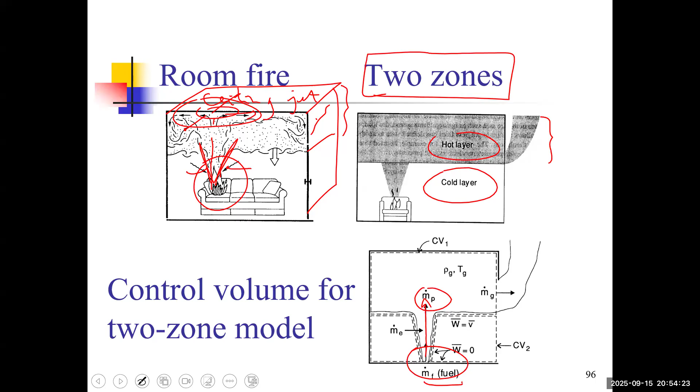The fire itself is a source of energy, and it is a source of mass — the plume. The fire's plume is to transport the mass to the upper layer from the lower layer, or from the lower zone, with entrainment.

With the hot air having less density, it rises, and a temporary vacuum will occur, and adjacent air will entrain into that vacuum and replace it. A larger volume of air will increase as a result, with the smoke plume increasing in size and volume.

A main assumption is made: the gas is treated as an ideal gas, meaning it has constant molecular weight and constant specific heat, Cp and Cv.

The zone model also exchanges mass at the boundaries because of pressure difference and shear mixing. Combustion is treated as a mass and energy source. The plume is assumed to instantly arrive at the ceiling.

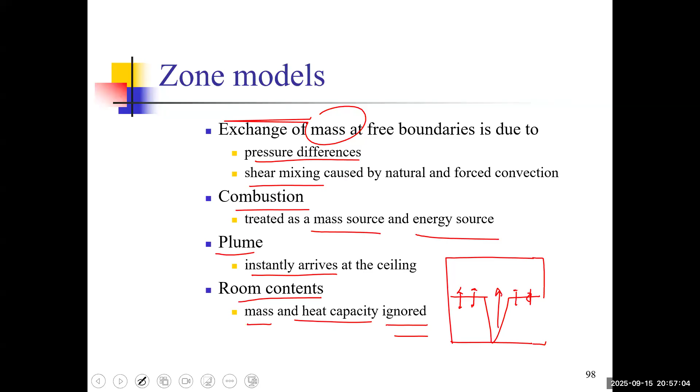A major problem is the too-clear structure — actually there is some transfer in between these two zones, not just through the plume, but there may be others. So these are some of the assumptions made.

One of the two-zone models is called HAZARD I. It is developed by the National Institute of Standards and Technology and calculates the development of fire effects with thermal, toxic gas, and smoke with respect to time.

CFAST is another model, which is Consolidated Fire and Smoke Transport. It is a popular two-zone model developed by the Buildings and Fire Research Laboratory, also from NIST. It helps simulate smoke movement in up to 18 connected rooms. FASTLite, or Fire Growth and Smoke Transport, is a combined computer package with FPETool and CFAST, but it's limited to 3 rooms only.

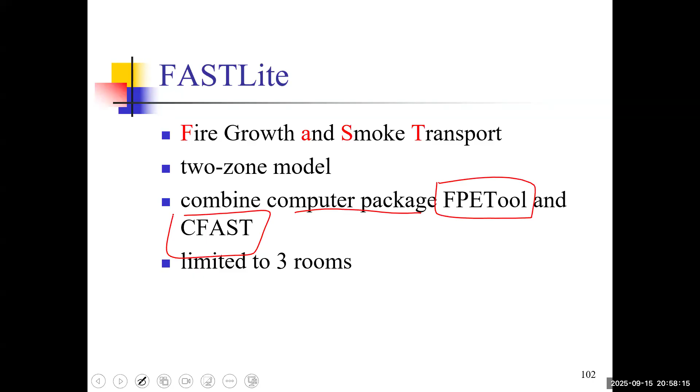Now, after zone models, we have the field models. Field models involve finite difference methods and finite control volume methods. There are partial differential equations, for example the Navier-Stokes equations. It involves turbulence, radiation, and combustion, which are three sub-models that need further investigation.

Field models have limitations because the physical principle behind the turbulence has to be reviewed, and the scheme for discretization of the set of equations needs to be considered carefully. The algorithm involves the pressure-linked equation, treatment of boundary conditions, and results have to be compared.

More advanced knowledge can be learned from your Computational Fluid Modeling subject, which is BSE 531.

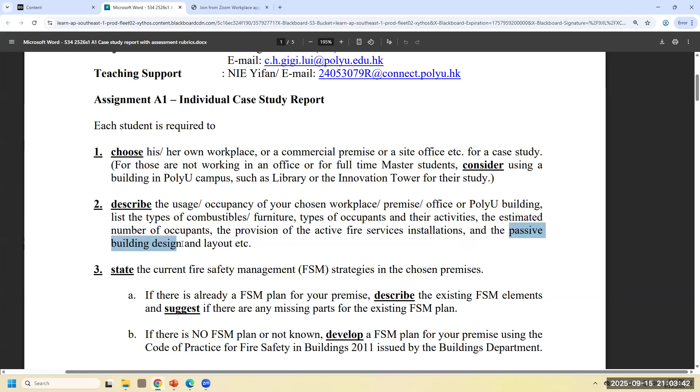Try to state the current fire safety management strategies in the chosen premises. I understand some companies have their own fire safety management plan or scheme, which may be in a booklet or in some publications. If there's already a fire safety management plan for your premises, try to describe the existing elements, how it is being covered, and suggest if there are any missing parts. If there's no fire safety management plan, or it's not known whether there is one, try to develop one for your premises.

Using the Code of Practice for Fire Safety in Buildings 2011 issued by the Buildings Department, as you know this Code of Practice is available, and remember Part F is on fire safety management. But I'm not asking you to directly copy all the items.

For example, in the maintenance plan, what do you need to focus on for your particular area or office? This depends on the fire load present, combustibles present, and the occupant characteristics. Office A should be different from Office B - they may have different fire loads, areas, or number of occupants. Training plan: are the staff well trained, or are there transients - people who just come over for a short time and do not know the environment well?

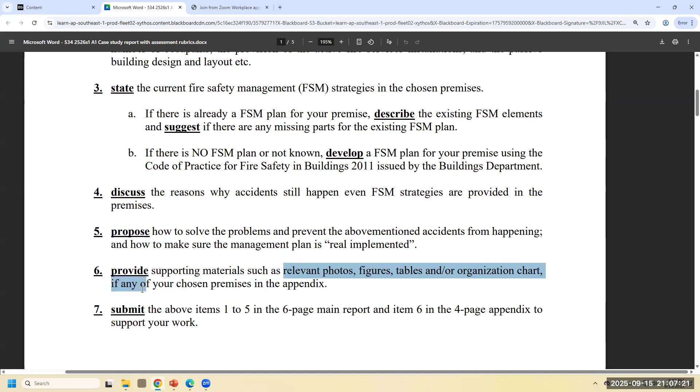Provide supporting documents and materials such as photos, figures, tables, organization chart, if any, for your chosen premises, or the evacuation layout plan, etc., can be included in the appendix. Submit item 1 to 5, that is the main report: 6-page main report, and item 6 in the 4-page appendix to support your work.

So the submission will be a soft copy of the individual case study report in a single PDF file in Learn at PolyU. I will later create another link for your submission at Blackboard under assessment. I will create a link through the Turnitin LTI.

The single PDF file possesses the cover page. So you have your BSE 534, Legislation Aspects of Fire Safety Management, your name, your ID, and label it as the individual case study.

6-page main report, 4-page appendix, single page. 6 single page main report, 4-page appendix. Reference list, if any—if you reference the codes of practice, you may include it in the reference list. And a declaration form.

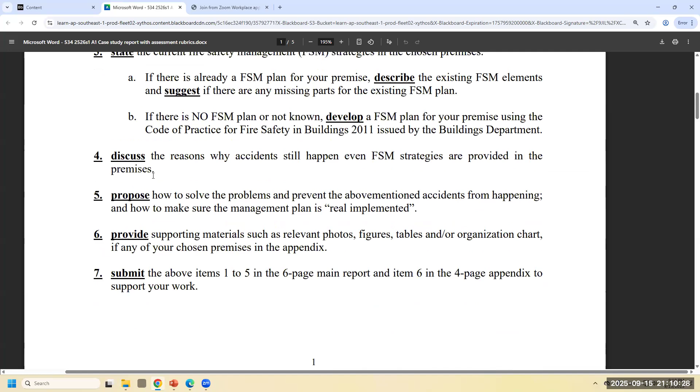Discussion, solutions and suggestions, which is related to, for example, proposed methods to prevent accidents from happening, how to have real implementation of the plan, and relevant photos, figures, and tables as supporting documents, 15%. Assessment criteria, the rubrics is listed.

For A, B, C, D, and F, with different percentages assigned.

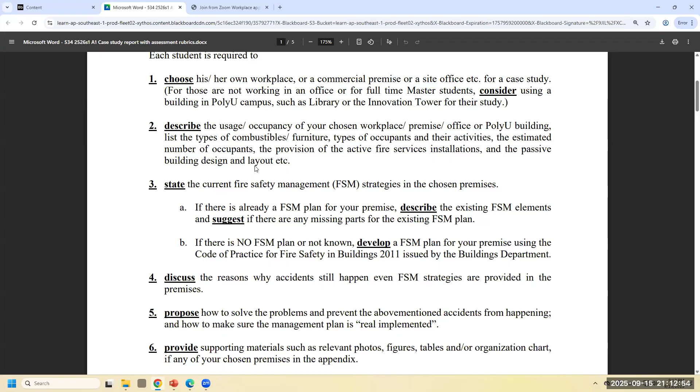Any questions about the layout and submission requirement? Okay, if not at the moment, thank you for your attention.

And we will continue part 2 of the performance-based code next time. By the way, I have already uploaded the documents in the content—Lecture 1 to Lecture 5 for my parts.

I think Dr. Wang has also uploaded Lecture 6 for her part. So I have heard some of you would like to print it in advance, so you can do it up to Lecture 6. Any other questions?